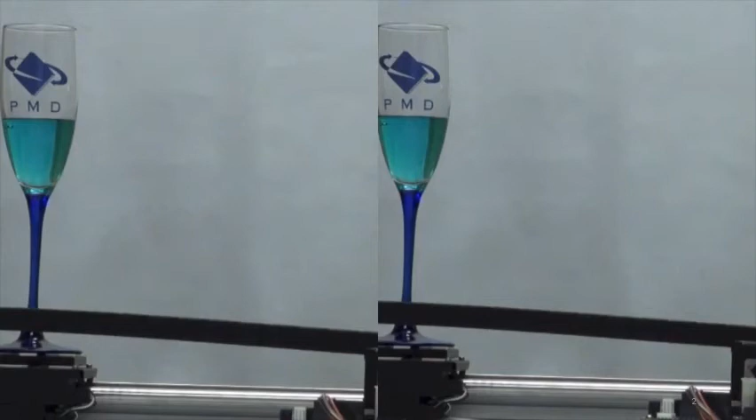As seen in the video, S-curve motion profiling is a powerful tool to significantly improve payload stability and smoothness of transportation. The base idea is that the corners of the traditional trapezoidal profile are flattened out into the S-curve profile, hence its name, where each order is a varying level of smoothness of the S.

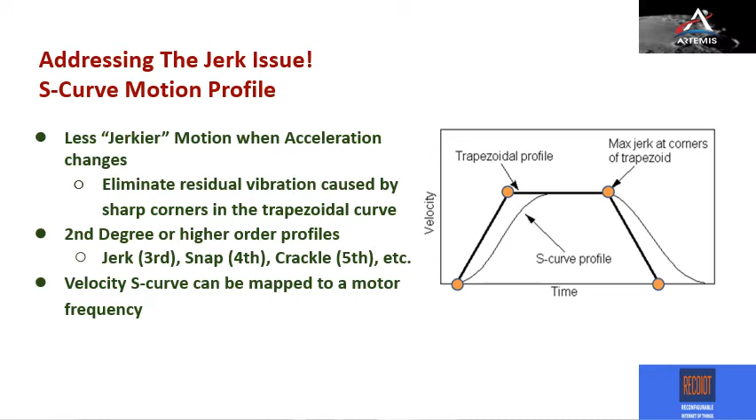This profile is what we'll map for our motor outputs to the various devices we will showcase in this presentation. There is previous work done by a predecessor group that implemented the first order S-curve and trapezoidal equations in Verilog on a PYNQ-Z2 FPGA board.

Our design has changed to be more of a software-based implementation, but it's cool to point out that there are many approaches to enabling more motorized S-curve motion profiles.

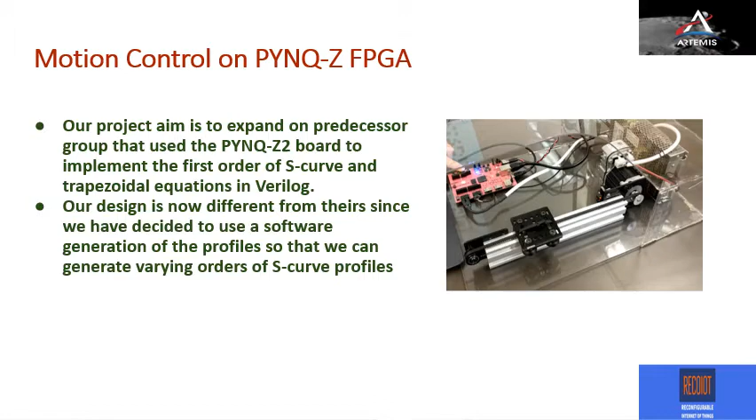Here's a video of the previous group's implementation of the S-curve motion profile.

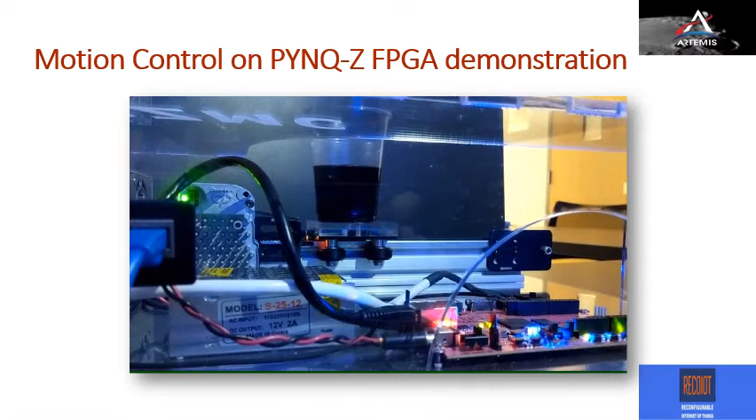We'll start out with the simplest implementation of straightforward and back motions. Our main targets will be stepper and DC motors driving a payload with our algorithm. Each motor has their own specific properties that apply them to various different applications, but our goal is to show that our algorithm will work regardless of that platform.

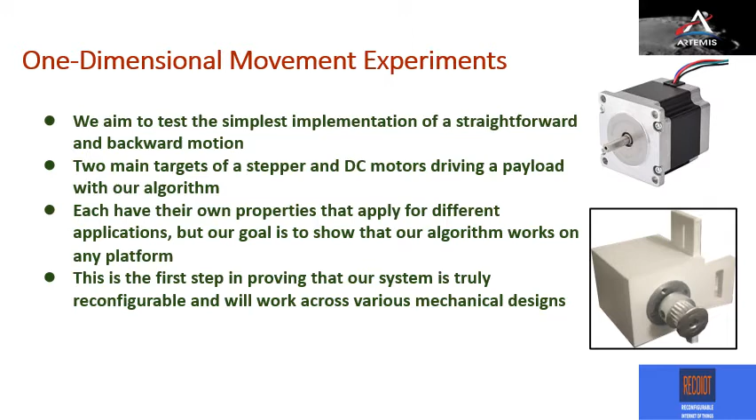This is the first step to proving that our system is truly reconfigurable and will be adopted and accepted as a trademark one-for-all system to use on any kind of motor driver device.

Here are the results from our open loop implementation with inputs of distance equals 6 centimeters, total time is 10 seconds, and order equals 4.

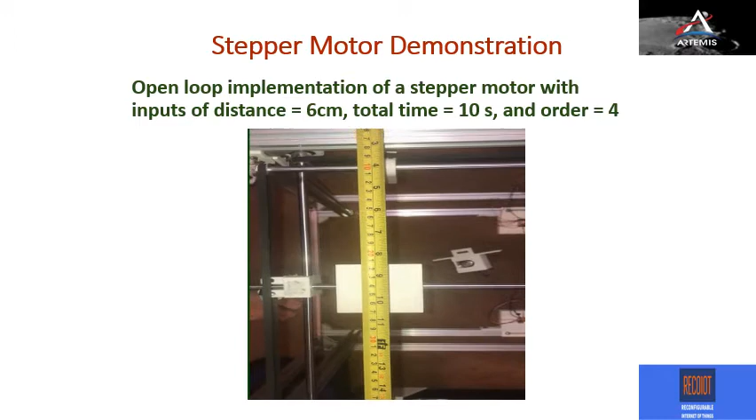Here is a demonstration of our free run movement.

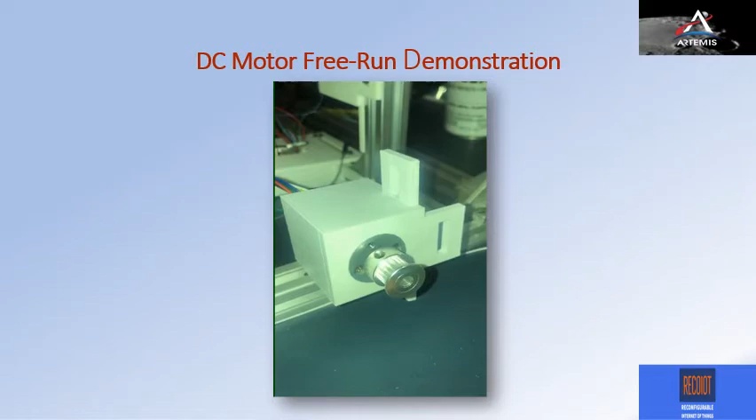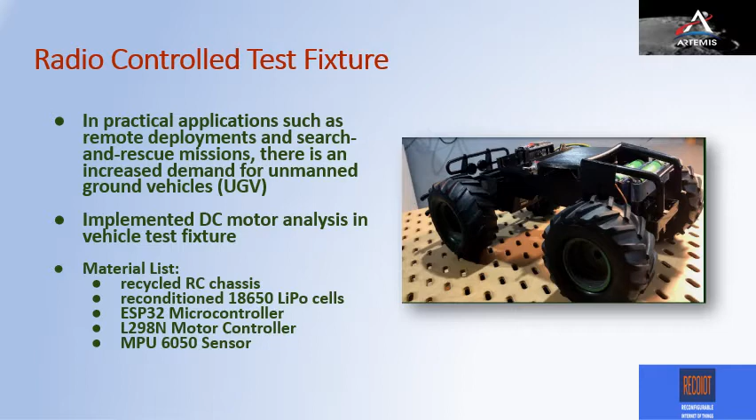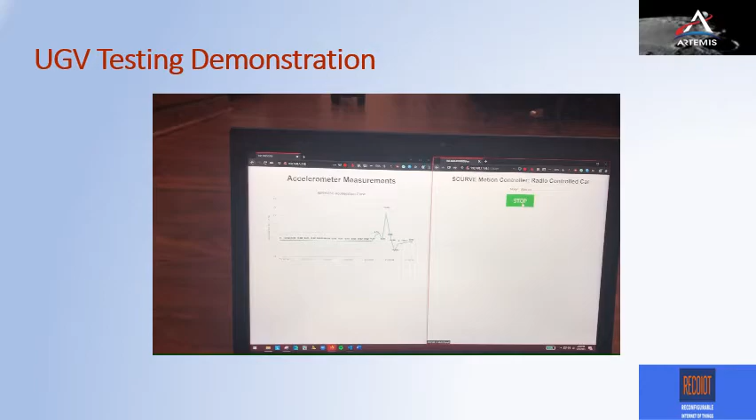For our UGV testing demonstration, we are able to host a remote web server that is able to send our S-curve motion profile commands to our implemented RC car and have the accelerometer return the data readings back to the host. For our final test application, we decided to test just how far we can push our system.

We decided to build our own custom drones to be integrated with our code. Due to the nature of most commercial drones being closed source for their flight software, we decided to build two separate drones.

One with a Pixhawk 2.4.8 and a Navio 2, the most common flight controllers upon our research that we could find. Both are supported by a companion computer Raspberry Pi to generate our code and drive the drones through the DroneKit API. We're in the process of testing and calibrating all of the hardware and sensors on the drone.

But we're hopeful that with our working code that compiles and runs, that we'll be able to fly a drone completely and automatically just with S-curve motion profiling.

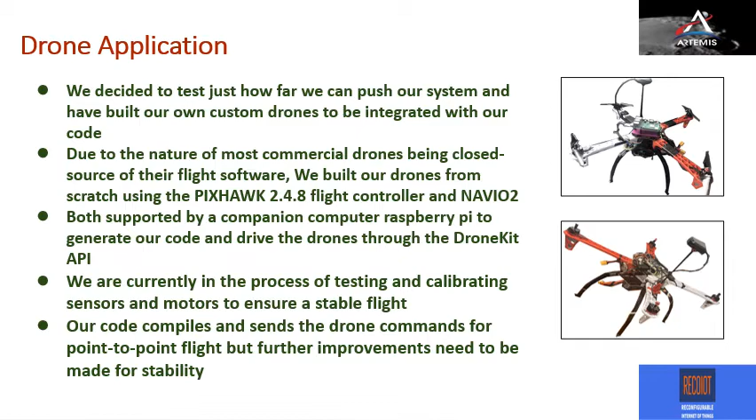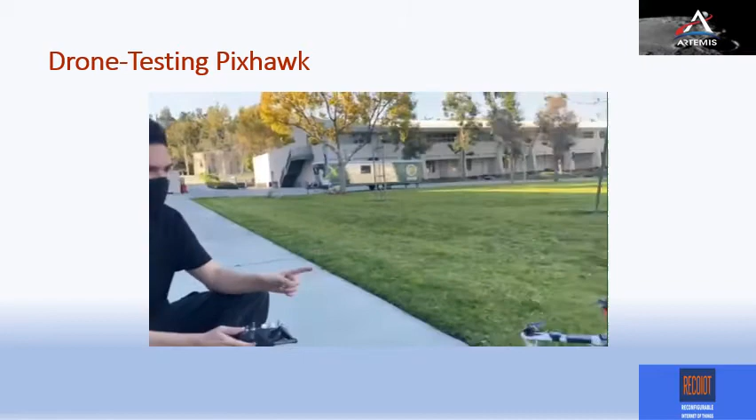Introduce yourself, please. Hello, my name is Brian Banta, and I'm part of Team Juno, and we're testing our drone calibration to see if our motors are working correctly and see if any fail for any roll pitch yaw movements on our setup. Sure. And I'm Professor Muhammad.

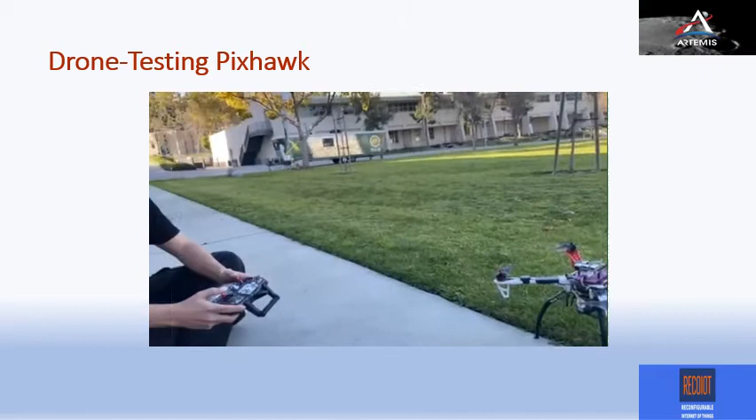Muhammad Ali. I'm the mentor of the Juno team, and we are now starting the test. Go ahead, Brian.

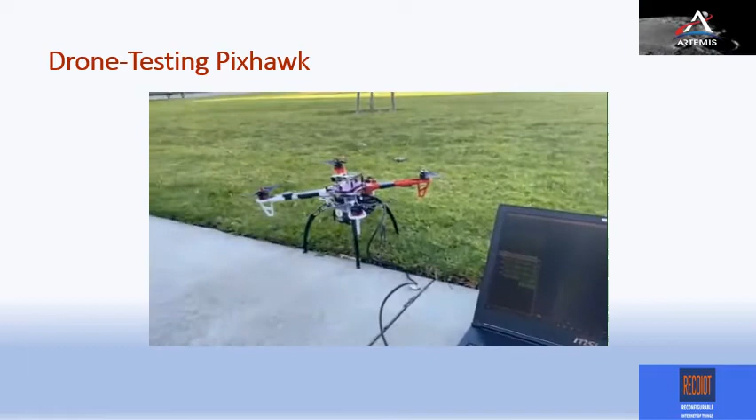The calibration has been done in the ArduPilot and the mission planner. And thank you, we appreciate it. Thank you.

Hi, this is Professor Muhammad Ali, the mentor and the head of the team Juno for the NASA MINDS, and this is actually test number 1 for the drones using Navio 2 as a flight controller. We try to do our best on fixing the whole entire drone with a lot of technical issues, and even due to the COVID-19 and all these problems we faced and the technical problem, but still we build the drone.

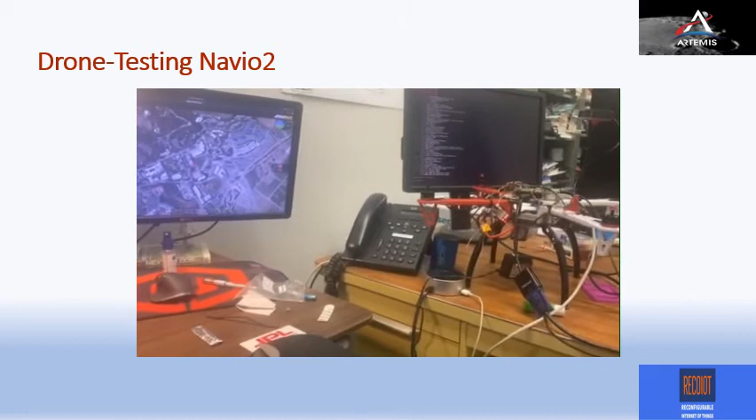And the previous video even shows how the PixHawk works, and we are in the process of loading the motion control we developed as a team on the drone using Navio and the PixHawk.

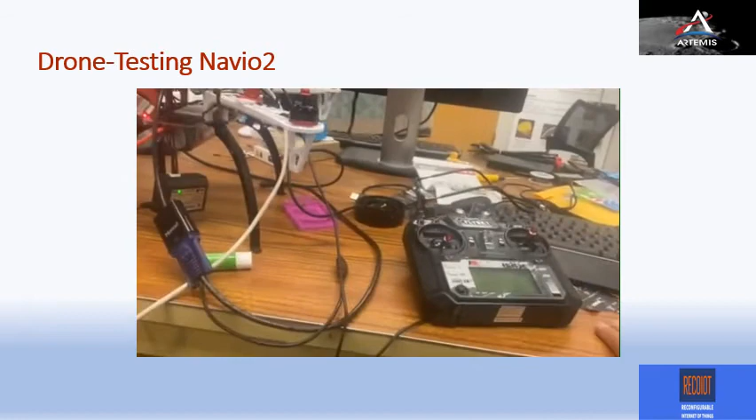So what I have here is on my Linux machine, I set up the QGroundControl while using the wire communication IP. I define the Navio on the board on the networking with the QGroundControl, and I just arm it and it's ready to use a radio controller for doing the test.

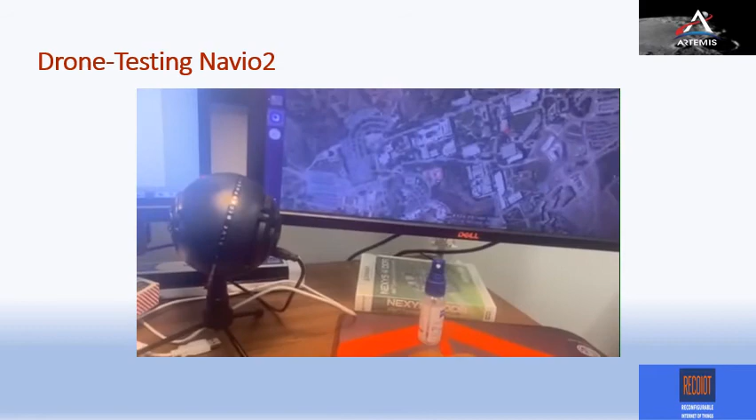So the test should start now. First of all, we're gonna push arm, and completely full on the arm while the GPS is determining that I'm sitting now in the office. Then the controller will start doing the work.

Going up and down, changing the communication after we calibrated the drone, and everything works perfectly as we expected. And thanks a lot, and talk later about the next step for the other parts of the project. Thank you.